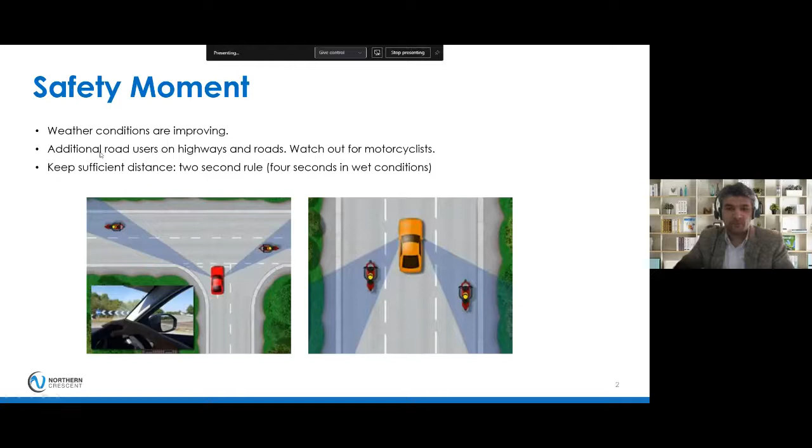Now, before we dive into today's topic, I request you all to please take a moment for this short poll. Realizing the diverse participation today, we thought it may be interesting to share groups' experience distribution with you all. We'll share the results of the poll towards the end of the presentation.

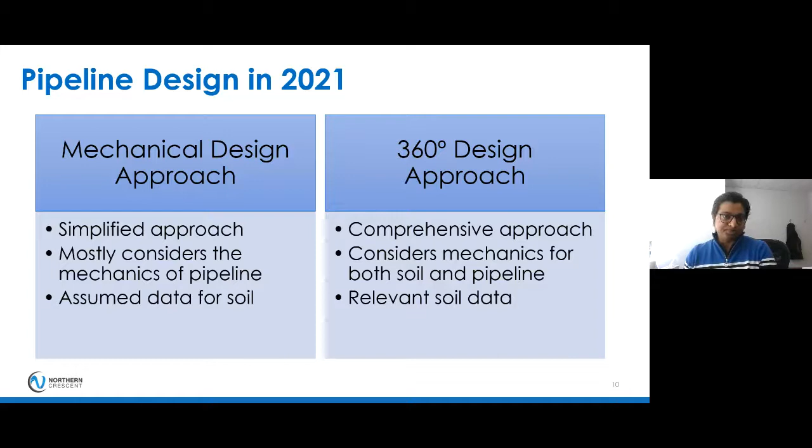The key takeaway here is that CSA Z662 has requirements for minimum soil cover, for example clause 4.11, but no detailed methodology or criteria for evaluating pipe-soil interactions in different soils. In other words, stress analysis is performed based on assumed soil properties, which results in a more subjective analysis. Regardless of the soil along the pipeline right-of-way, we generally define bends with 20D and 40D bends. This approach is typical for short pipelines.

Now some pros and cons. This approach can be adequate for pipelines operating at less than 30% of maximum operating pressure and with a temperature difference of 10 to 15 degrees Celsius. It's definitely a low cost solution.

Some of the cons: it has unknown risk if the pipeline is operating at generally greater than 70% maximum operating pressure and greater than 80% of design temperature.

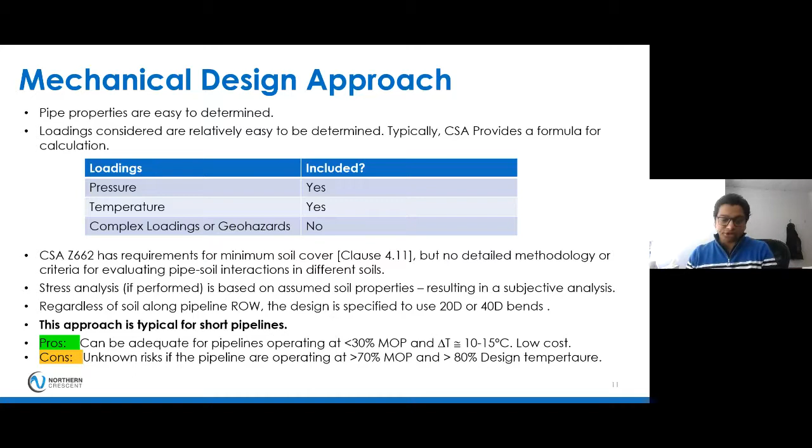On the other hand, the 360-degree design approach involves first doing a desktop study for the entire pipeline right-of-way to determine soil classifications, also known as terrain mapping, generally done by a geotechnical vendor. Based on the terrain mapping, additional geotechnical testing might be carried out depending on project to project and on the specific conditions.

After the terrain mapping and assuming soil properties from it, a detailed stress analysis is carried out with relevant soil properties for the actual right-of-way. This approach is typical for large transmission pipelines.

Pros: the pipeline has high reliability regardless of design conditions and soil conditions along the whole right-of-way. Cons: high cost of the field program, longer design schedule, and increased cost and schedule due to involvement of two separate vendors - for example, terrain mapping by a geotechnical vendor and stress analysis by a separate stress vendor.

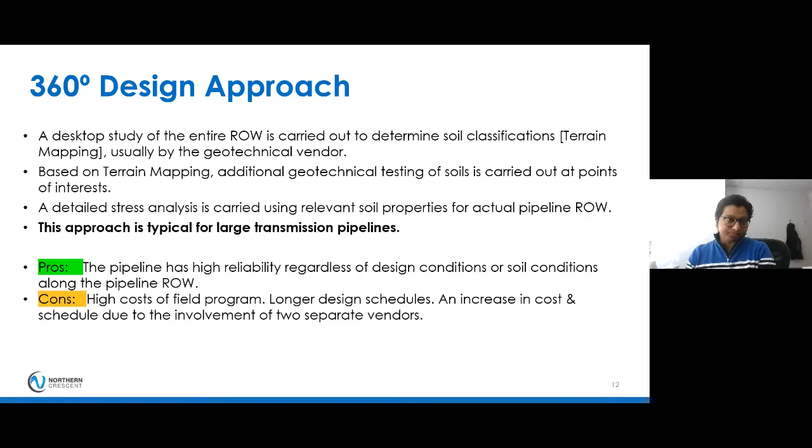Not only the pipeline design itself - if you're designing a buried pipeline, in most cases you need to deal with soil. For example, thermal expansion behavior, or thermal stress analysis, is primarily related to pipeline design. Other than that, global buckling, whether lateral or upheaval buckling, ratcheting issues, geohazards - either rapid landslide or slow ground movement - and hydrotechnical hazards. In most cases you need to deal with soil, and pipeline behavior can vary based on differences in soil types.

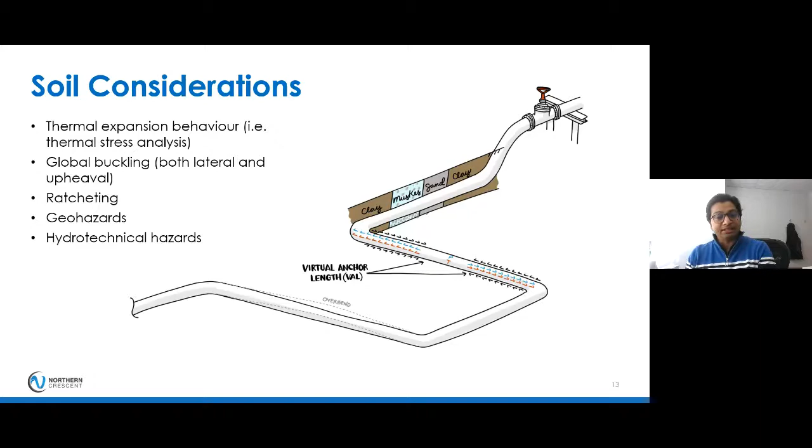This leads to a question: can a pipeline fail due to thermal expansion? This is a classic example of a pipeline rupture that occurred on 17th October 2013 near Fort McMurray, Alberta. The Transportation Safety Board's whole investigation report is available.

They mentioned the reason as: during normal pipeline operations, thermal expansion developed in the pipeline that exerted force on the elbow, resulting in increased stress in the intrados of the elbow. Over a 50-day period prior to the rupture, the pipeline had been operating at a sustained temperature ranging from 42 to 48 degrees Celsius and a maximum pressure in the range of 9,200 kPa.

Interestingly, the soil condition at the rupture site consisted of an organic deposit, popularly called muskeg, approximately 0.5 to 1.5 meters thick with underlying clay.

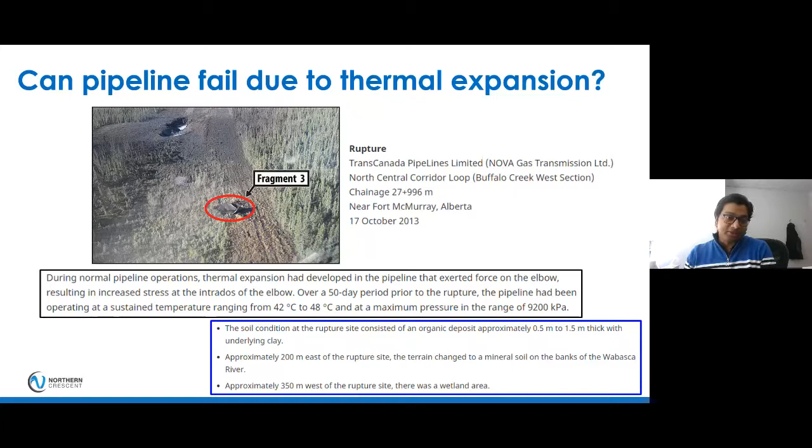With all this being said, the focus of today's presentation is how the mechanical design approach for pipelines can be improved, and we will refer to our own in-house tool, PTrain, that we have developed.

A little background on how we take soil into account in pipeline analysis. Generally, the soil around your pipeline is represented by three orthogonal soil springs - lateral, axial, and vertical. Note that the vertical spring has two different stiffnesses, one in the upward direction and one in the bearing direction. So in other words, there are four soil springs: lateral, axial, uplift, and bearing.

The available guidelines to model the soil springs, or define the soil stiffness, are popularly the American Lifeline Alliance 2005, and the Pipeline Research Council International 2009 and 2017.

Now, to define the soil spring, what you basically need is the peak resistance of your soil and the displacement to reach that peak force. If you know these two pieces of information, you can actually define the soil spring along your whole pipeline.

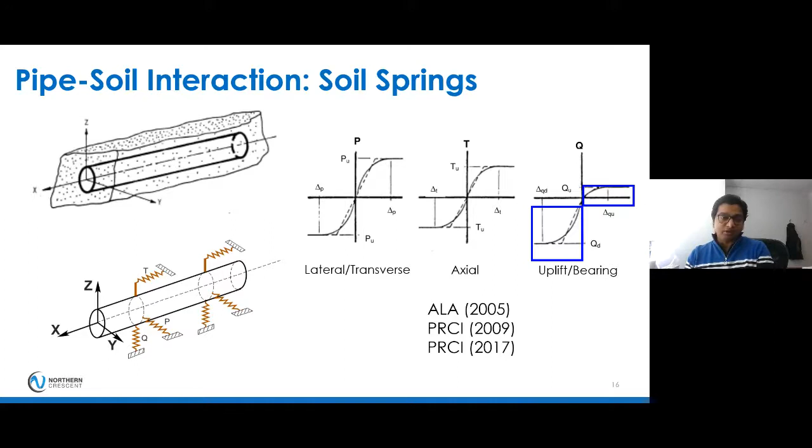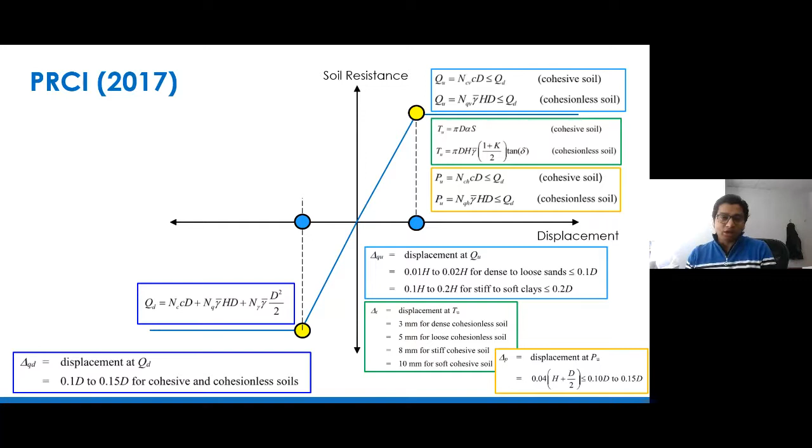Now, the major thing is, what are the soil parameters that we need to define these soil springs? The major soil parameters that we need are undrained shear strength, friction angle, unit weight of the soil, soil cover or burial depth, and coefficient of earth pressure at rest.

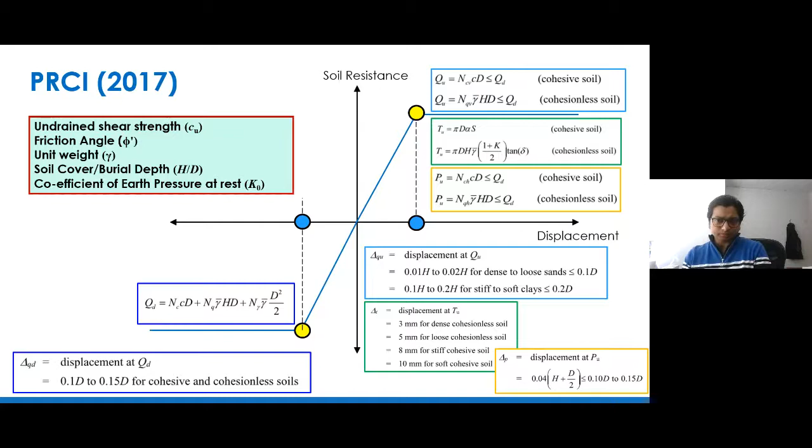Even if we further refine it, the two strength parameters that we need for the pipeline analysis are the undrained shear strength, which is for clay type soil, and the friction angle, which is for sandy type soil. If we know these two important pieces of information, we'll be able to define the soil springs along your pipeline and complete the pipeline analysis.

Instead of just saying that our terrain mapping is helping improve the pipeline design, why not we see an example? This is a practical example that we'll be showing throughout the presentation. This is a sample pipeline, as you can see.

It's a small pipeline, NPS 10, with design temperature 55 degrees Celsius, installation temperature -10 degrees Celsius. Your specified minimum yield strength is 359. We assume soil cover of 1.5 meters, wall thickness 6.4 millimeters, and maximum operating pressure of 9.93 MPa.

This pipeline has a total of 34 bends, as you can see on the right-hand side. The bends vary from a shallow angle of 7 degrees to a maximum of 90 degrees, so it has a wide diversity of bend angles. Just to simplify, we have defined all bends with a 20D bend radius.

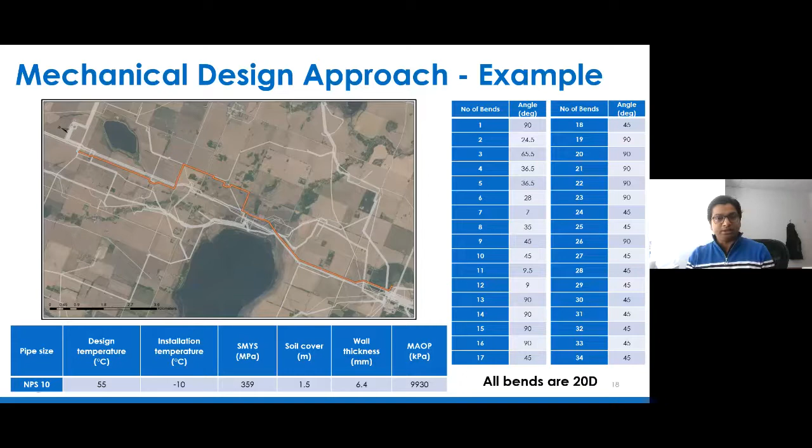The main target of this example is not to do a whole pipeline design, but rather to show how this terrain mapping can help improve your design. So the main thing we're going to change here is the soil parameter. We are keeping all the bends as 20D, all the bend information, and all the pipeline properties as you see on this screen.

Now, for this pipeline, we need to do a thermal stress analysis. Generally, we don't have the luxury for a smaller pipeline to have a detailed geotechnical report or any soil information, so we need to assume something. You probably give the same pipeline to two vendors, and case one is probably one vendor assuming...

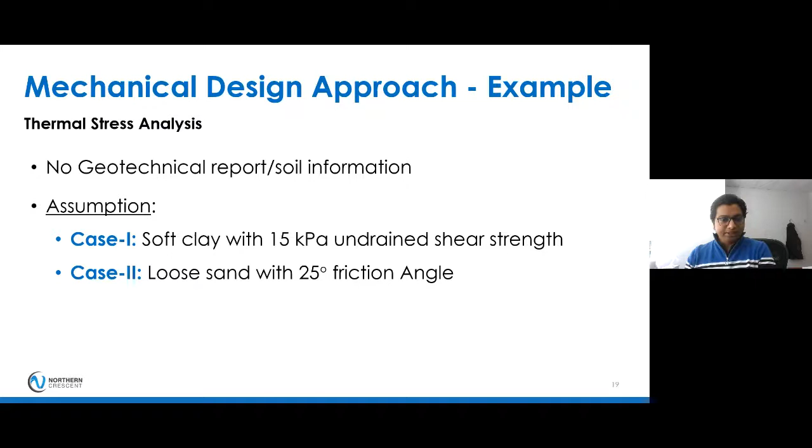a soft clay with 15 kPa undrained shear strength, which is very reasonable and a common practice. And probably the other vendor says, no, we want to be more conservative, and we want to assume loose sand with 25-degree friction angle. So you can have two cases for the same pipeline, and both are reasonable assumptions, I would say.

What we did here, we actually ran the same pipeline stress analysis with both cases. The first one is soft clay with 15 kPa undrained shear strength. These are your spring properties or spring stiffness for 15 kPa soft clay soil, and these are your spring stiffness for loose sand with 25-degree friction angle.

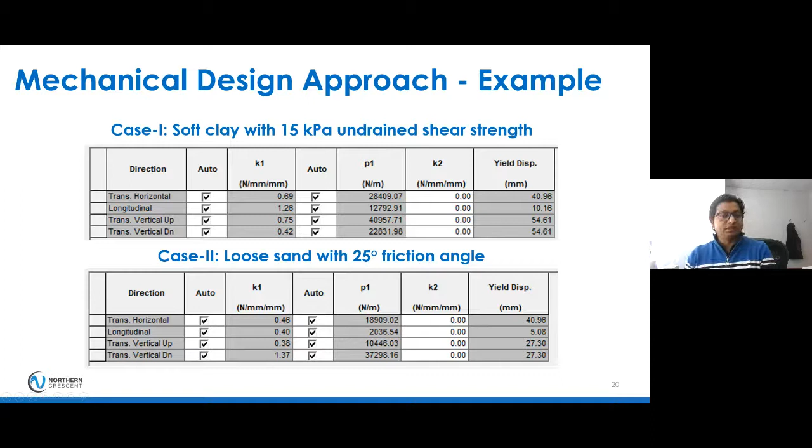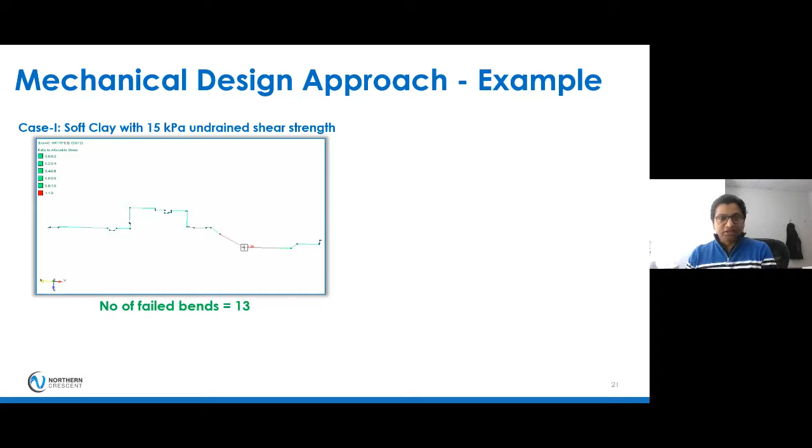Now we ran the analysis, and we can see for case one, soft clay with 15 kPa undrained shear strength, the number of failed bends is 13. By failed bends, I mean where the stress has actually exceeded your SMYS, or specified minimum yield strength. Now if I look at case two, with loose sand at 25-degree friction angle, the number of failed bends is 25.

This is generally expected because when you assume loose sand, you are assuming a lower strength compared to clay type soil. So in summary, we have done these two cases of pipeline stress analysis, simple, we haven't changed anything else, just the soil properties. For case one with soft clay, we found 13 bends failed, which requires further measurement or action, either a solution with increasing bend radius or whatever it is. For case two, loose sand with friction angle, the total number of failed bends is 25.

So there is a gap between these two.

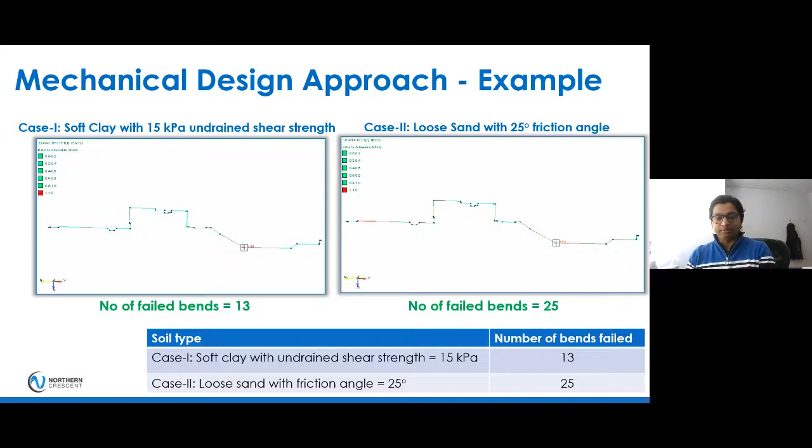Now let's see how this terrain mapping can actually help this analysis. But before we jump into that, what is basically terrain mapping? Terrain mapping provides information about landforms and the distribution of surficial materials, and natural processes operating at the landscape.

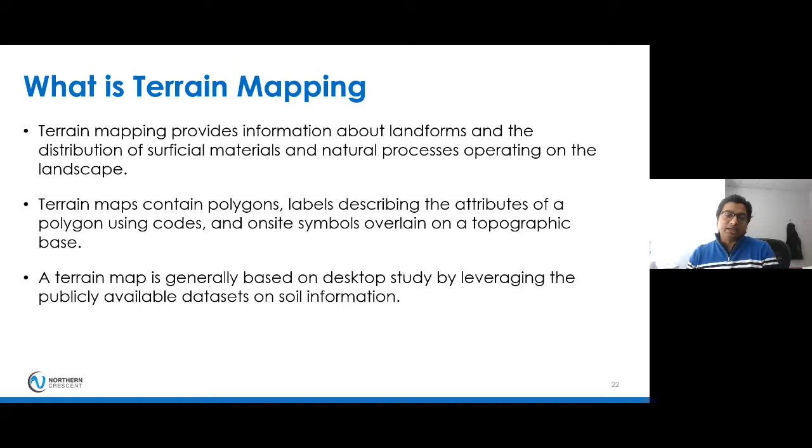In summary, terrain mapping can give you the soil properties along your pipeline right of way. So the pipeline crossing different soil types, terrain mapping can give you information on those soil types. Generally, terrain mapping is done based on a desktop study, by leveraging publicly available datasets on soil information.

Now, what pTerrain can do. We have developed our own in-house tool, our software, which we named pTerrain, which is basically pipeline terrain. So pTerrain is an in-house tool or software for terrain mapping. It has a robust dataset for soil for several provinces, including Alberta, British Columbia, and Saskatchewan. Right now we are trying to include other provinces and some other states in the US as well.

A unique feature of pTerrain is it has a significant, enormous dataset of wetlands in Alberta, which we popularly know as muskegs. There's also a supporting dataset of publicly available geotechnical boreholes and reports. We added this to give a second level of safety for your educated guess of soil parameters by the geotechnical engineers. So it's not only that the in-house geotechnical engineer gets soil information from the terrain mapping, they can also compare it against any available geotechnical borehole reports closer by that area, giving a second level of safety on understanding the soil.

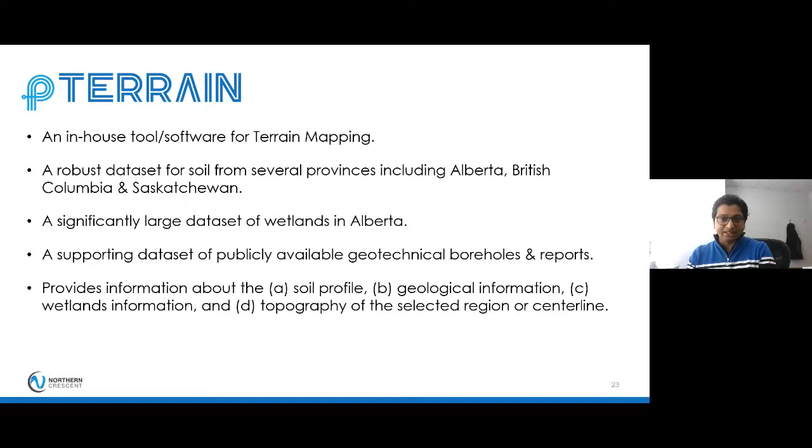Finally, pTerrain provides information about the soil profile, geological information, wetland or muskeg information, and the topography of the selected region or center line. So if you run your pipeline right of way through pTerrain, it can give you a lot of useful information, especially on the soil types the pipeline is crossing. I know it's a little hard to visualize just by listening, so let's see what pTerrain can actually give you.

pTerrain gives you a map like this. As you can see, your pipeline is crossing different types of soil, shown as different colored polygons. The letters are a bit small to read, but if I zoom in, it gives you the chainage to and from, the different soil names - A, B, C, D, E - the texture class, for example whether it's silty clay or clay, and it also gives you the surficial geology.

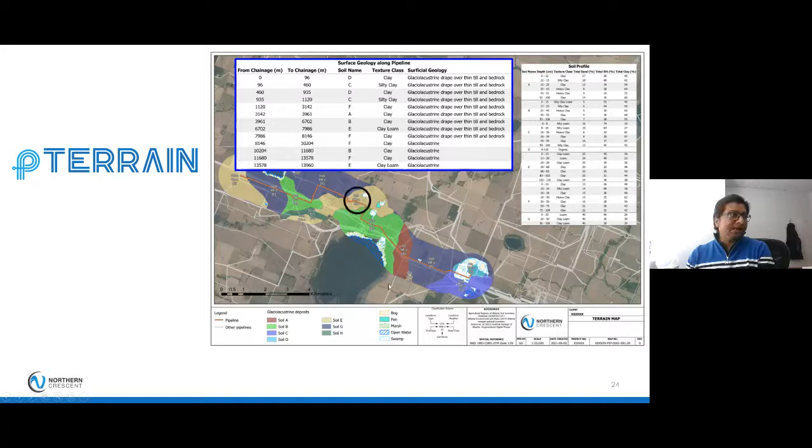Not only that, if you zoom into this section, for type E soil, it also gives you the soil depth - for example, from 0 to 13 centimeters, 13 to 20 centimeters, what type of soil you are assuming is there. And it will also give you a percentage of sand, silt, and clay.

So let's say your depth of cover is 1.2 meters. In that case, you can have an idea that you have a clay loam type of soil, and you're expecting around 24% sand, 38% silt, and 38% clay. So now instead of making a wild guess, you have more information to gauge or assume your soil properties.

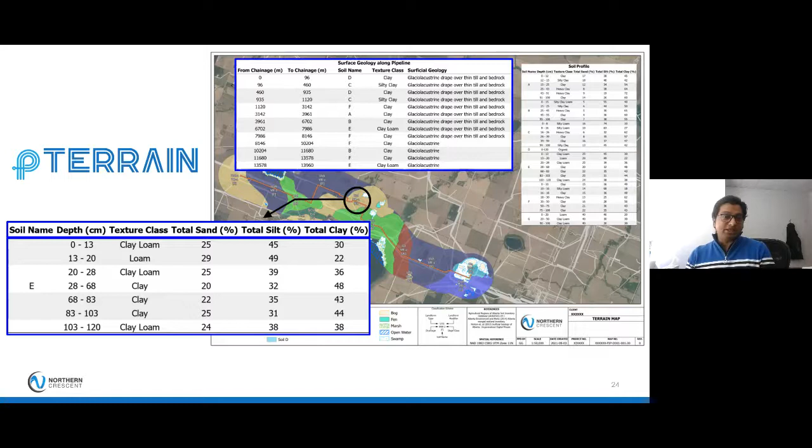As I showed, we did two analyses. Case one was soft clay with 15 kPa undrained shear strength. Case two was loose sand with a 25-degree friction angle. Now we are adding case three, where we use this terrain mapping information I just showed you, and we are not counting any muskeg right now - so terrain mapping without the muskeg.

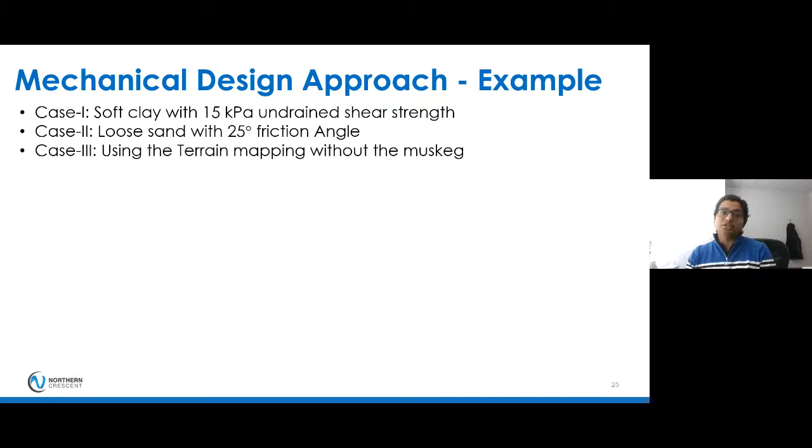So what I can get from here, from the terrain mapping, I can get the soil, different soil identifiers that your pipeline is crossing. I know the percentage of sand, silt, and clay, and then I can assume better soil properties based on this information.

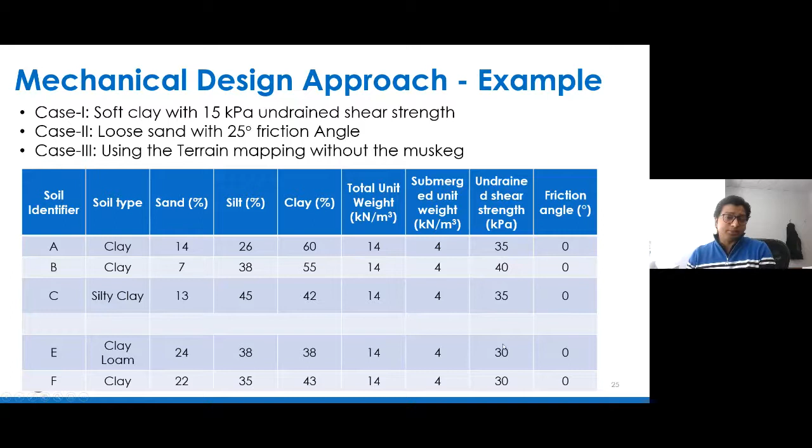So for example, let's say type B, we have only 7% sand and the rest 93% is basically clay type soil. So it's reasonable to assume a higher undrained shear strength for clay for this type of soil. On the other hand, for type E, we have 24% sand and 76% clay. As we have a higher percentage of sand, we assume a lower undrained shear strength, for example 30 kPa, and then we do the analysis.

Before we do the analysis, we actually define the soil properties using the same methodology for defining the different stiffness for all types of soil. We included it in the model and we ran the analysis.

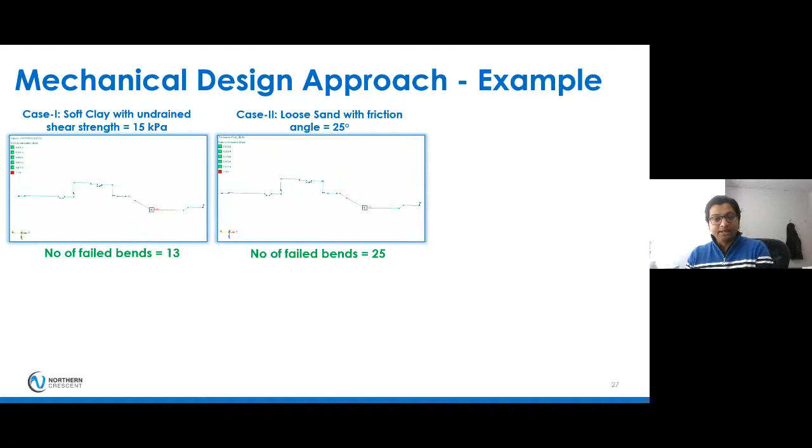So what we're seeing here: case one, soft clay with undrained shear strength, number of failed bends were 13. Case two, loose sand with 25-degree friction angle, number of failed bends were 25. Now, using the terrain mapping without the muskeg, our number of failed bends is now 9. So this is definitely an improvement.

And we are not doing any wild guess. Now we have a more educated guess for our assumption of the soil parameters. So you can see that it can actually significantly improve your pipeline behavior as well.

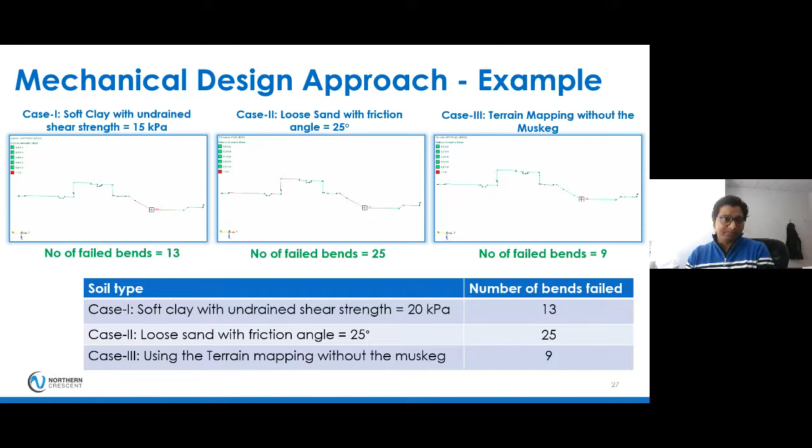Now, another interesting and unique thing for pTerrain is the addition of the muskeg and wetland database. As I mentioned, we have included an enormous data set of wetland or muskeg, primarily for Alberta, in our data sets, and we have changed some attributes to make it clear.

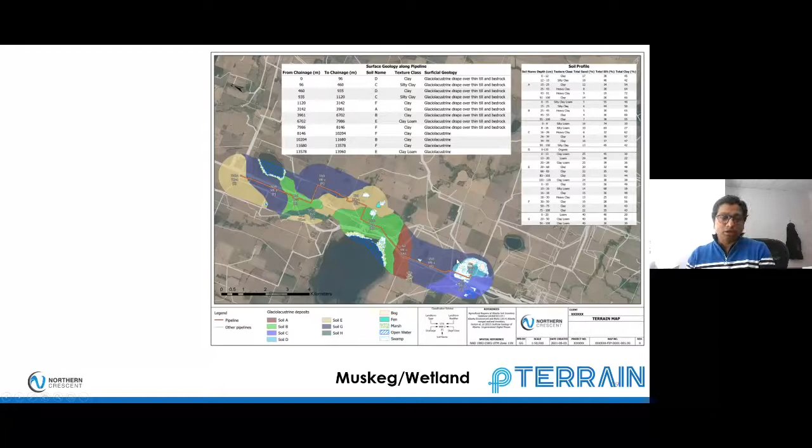As you can see in this picture, the pipeline that we use for the example was somewhere here, but you can see it can actually give you a lot of information on the muskegs and the wetlands. So basically, the same pipeline that we used covers a small region, or the pipeline crosses a region where there's a muskeg.

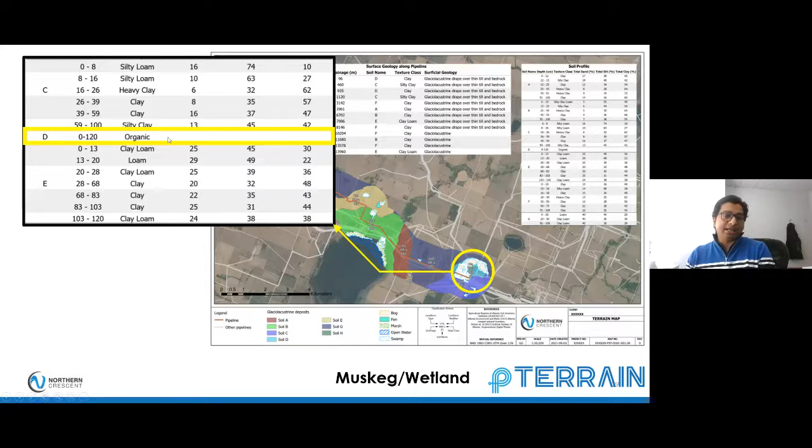So if we zoom in, you can see that your pipeline actually crosses the type D soil, which is defined as organic soil. So organic soil, in other words, is like a muskeg type of soil.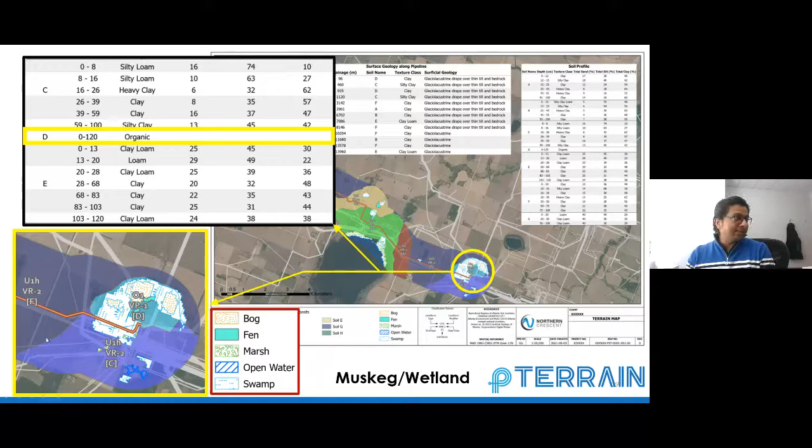Now if we further zoom in, we can actually see different types of muskeg, for example bog, fen, marsh, open water, or swamp type. So it can give you reasonable information about the muskeg as well, and we can see that this section of the pipeline is actually crossing a muskeg.

So what we did here, we actually did 3 cases, as you can remember. The first one was soft clay with 15 kPa undrained shear strength. The second one was loose sand with 25-degree friction angle. And the third one was using our terrain mapping, or P-Terrain, without the muskeg.

So why not add another case? Case 4 is basically using the same terrain mapping, but we are including the information of the muskeg or wetland as well.

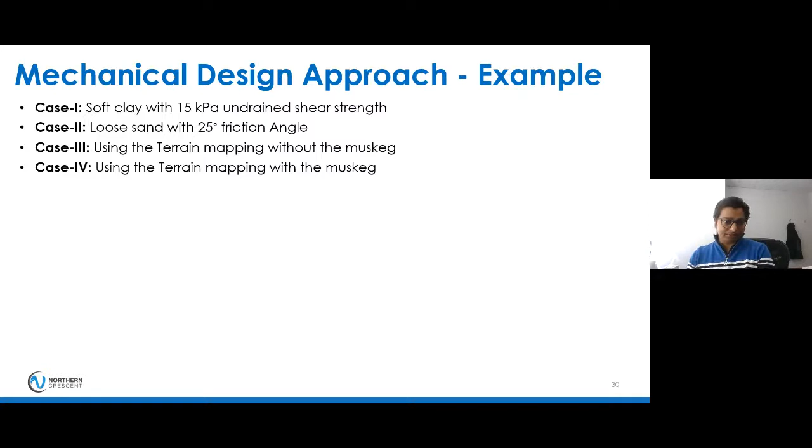Now, as you can see here, soil types A, B, C, E, F are the same exactly as what we used for case 3. We are just adding the properties for muskeg, and we have defined muskeg as a very weak soil. We don't want to take any risk, so we just defined it as 3 kPa undrained shear strength for now, for this example.

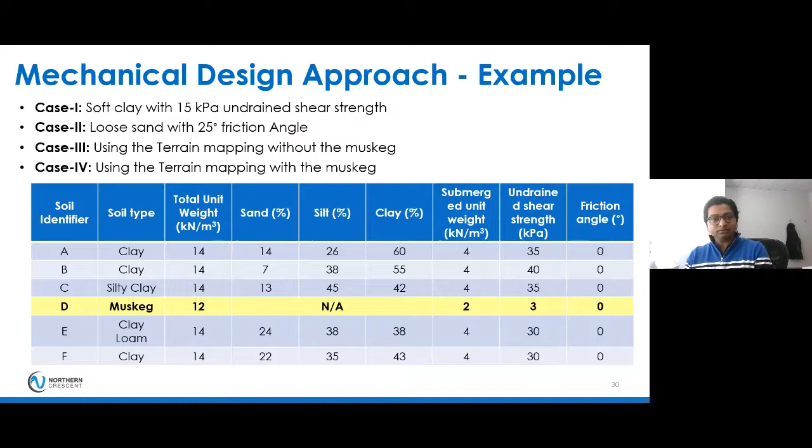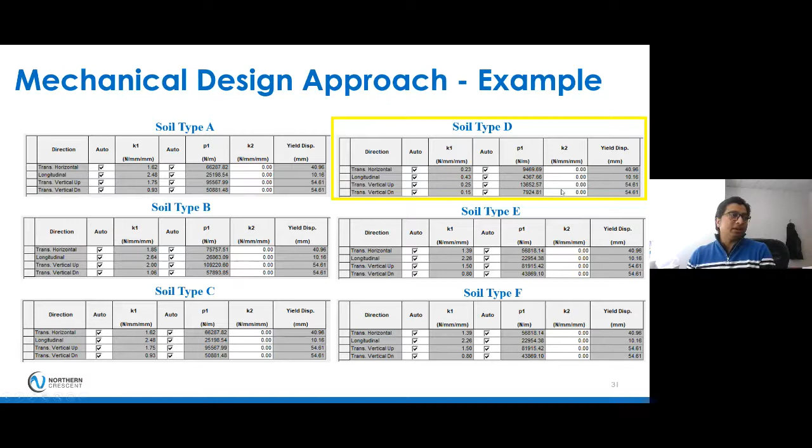Again, the same thing: we have defined the soil spring stiffness for different types of soil, from soil type A to soil type F. It's all the same. We are just adding soil type D, which is basically your muskeg, and we are defining the properties for your muskeg as well.

Now we ran the same analysis, and just to give you a refresher: for case 1, soft clay with undrained shear strength of 15 kPa, our total number of failed bends were 13. For case 2, loose sand with 25-degree friction angle, total number of failed bends were 25.

For case 3, where we didn't use the muskeg properties but used our terrain mapping, we found the total number of failed bends was 9. Now with case 4, using the same terrain mapping by P-Terrain with muskeg, our number of failed bends is still 9. So there's not a significant improvement by using muskeg properties.

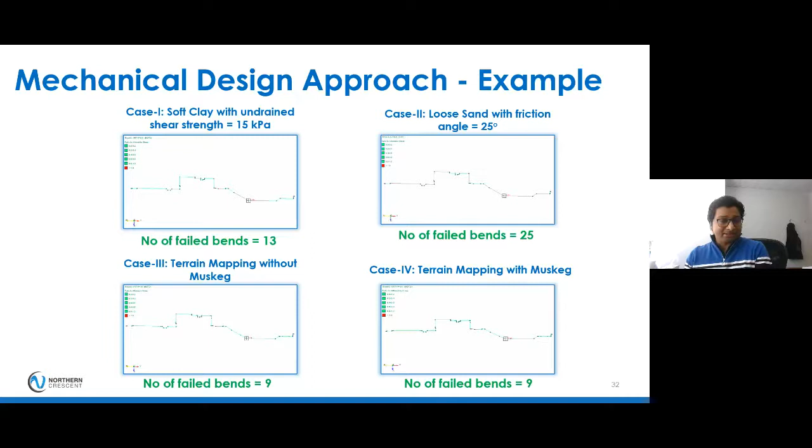But let's look a little deeper. For example, in case 3, terrain mapping without including any muskeg, this particular bend was failing. But when you use muskeg with the terrain mapping information, instead of this bend, another bend is failing. So if you don't take these muskeg properties into your pipeline analysis, you may be missing pipeline bends that need further action.

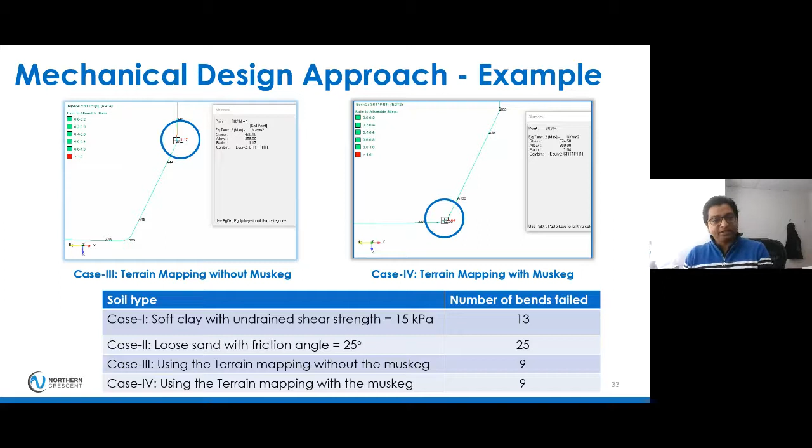So in summary, we used 4 types of analysis. Case 1, soft clay with undrained shear strength of 15 kPa, total bends failed was 13. Case 2, loose sand with friction angle of 25 degrees, number of bends failed was 25. We didn't use any terrain mapping in the first 2 cases; it was just an assumption, the same soil assumption for the whole pipeline. Case 3, we used our terrain mapping with a more educated assumption of the soil properties, without muskeg.

We didn't use the muskeg in case 3, and found the number of failed bends were 9. In case 4, we used the terrain map and included the muskeg, and saw the number of failed bends was also 9, but the bends that actually failed with muskeg are different from the bends failed without muskeg. So it needs to be considered.

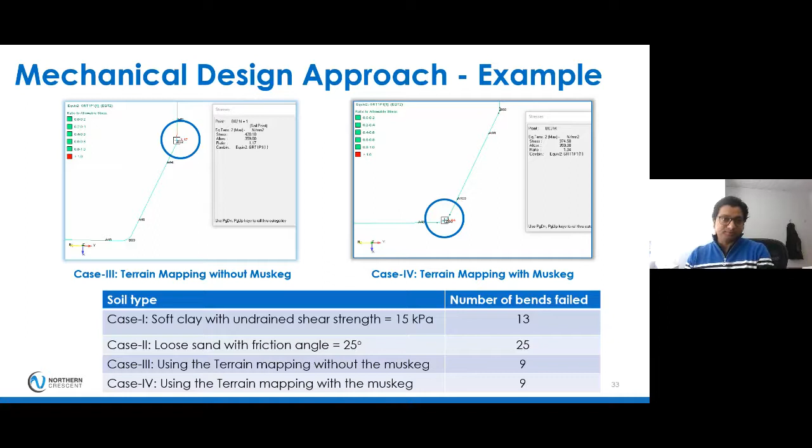In summary, integrating your desktop terrain mapping, or P-Terrain, with a mechanical design approach for pipelines can significantly improve your pipeline design. Rather than making a wild guess of one type of soil along the whole pipeline, you're making a more educated assumption, and P-Terrain is actually helping you make that assumption and do a better analysis.

Now, P-Terrain can be used for different cases, both for new pipelines and existing pipelines. For the design of new pipelines, we've shown an example for thermal stress analysis, and it definitely can help with that. It can also help identify wetland and muskeg locations in the area where you're planning to build your pipeline or facilities, and it can help with buoyancy control specifications by giving more detailed information on wetland and muskeg.

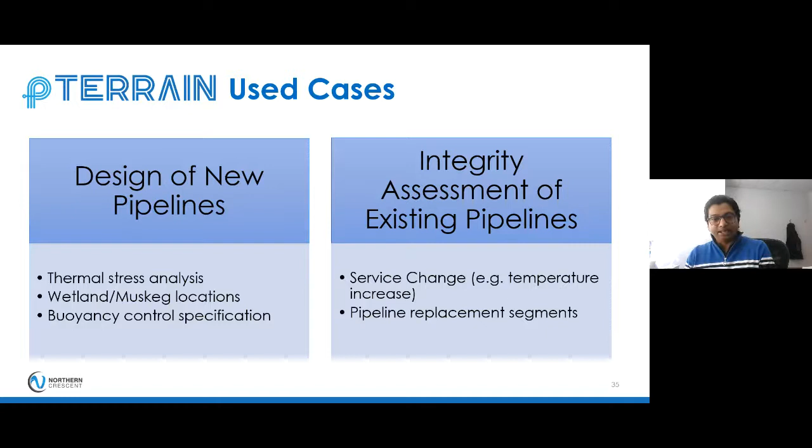Similarly, for existing pipelines, for integrity assessment, if you have an existing pipeline and need a service change, for example increasing your temperature, then you need to run the pipeline stress analysis again. P-Terrain can help you conduct that integrity thermal stress analysis. And if you have sections of pipeline or segments that need replacement and you need soil information at that location, P-Terrain can definitely be helpful.

One interesting thing that happened: Omar asked me yesterday, when we had almost finished preparing the presentation, how many projects we've used P-Terrain in. I initially thought it shouldn't be long, but we actually used it in over 60 projects with 6 plus clients. It can be as simple as a small feeder line or a long, medium to large pipeline crossing different types of soil. So it doesn't matter whether it's a small pipeline or a mid-sized to large pipeline, we can cover it all, and P-Terrain can give you useful information about the soils.

The major key takeaways are: first, terrain mapping using P-Terrain definitely provides a safer design for buried pipelines, as we showed by the example. P-Terrain reduces the uncertainties in design due to soil assumptions, which I think is a very important step, because when you make a wild guess for your soil over the whole pipeline, you're introducing a lot of uncertainty. P-Terrain reduces that uncertainty, mainly due to soil assumptions. And one unique thing is the integration of wetland or peatland, popularly known as muskeg areas, which really enhances the accuracy of the pipeline design by identifying areas requiring special measures.

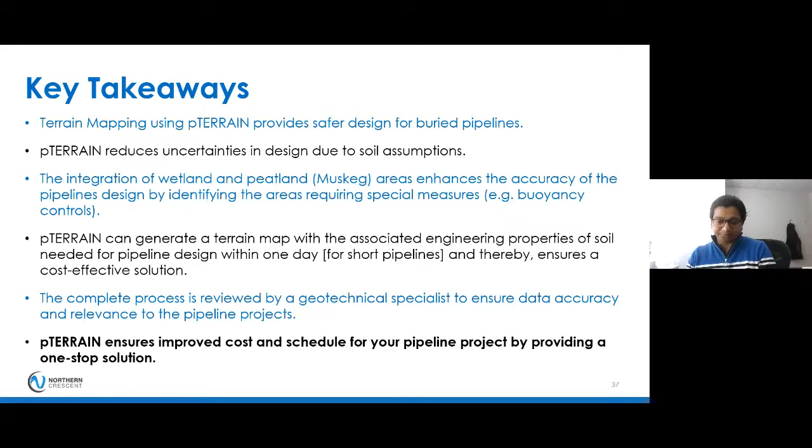So we can actually do that terrain mapping by P-Terrain and also conduct the stress analysis at the same time. So that's pretty much all I had for today.

We actually got the poll results in, and thanks for participating in the poll. So the question was, in your experience, what is the most common source of cost overruns on pipeline projects? And the results are pretty interesting.